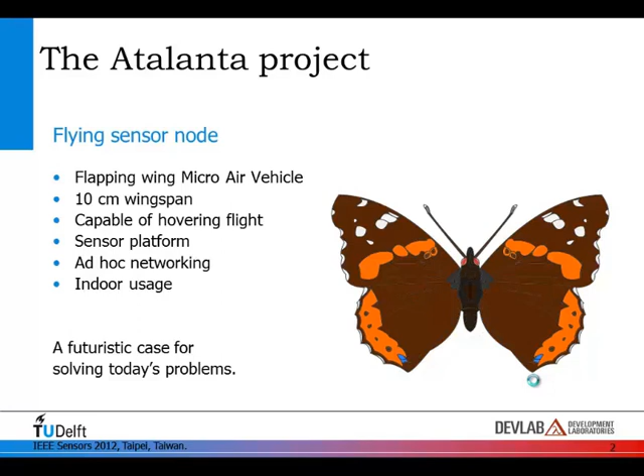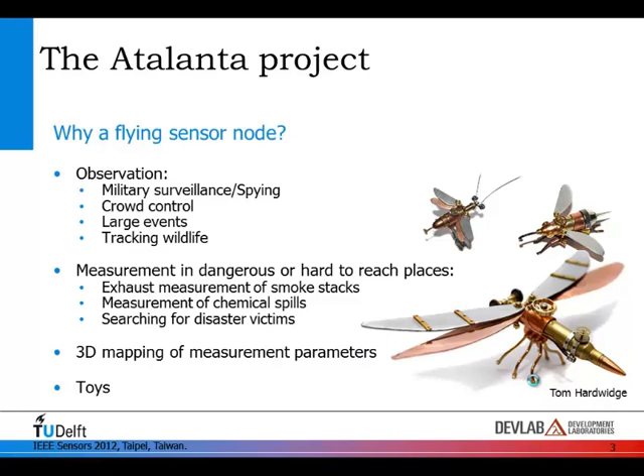I wanted to show you some of the problems and inspirations we found. There's a lot of applications for it. You could do 3D measurements, but of course everybody immediately thinks about military surveillance. But there are many other options, like measurement in dangerous or hard to reach places, or 3D mapping of spaces.

Animals have been flying for a long time, so how have they been doing it? Both insects and birds are at that size, about 10 centimeters. So what are they doing?

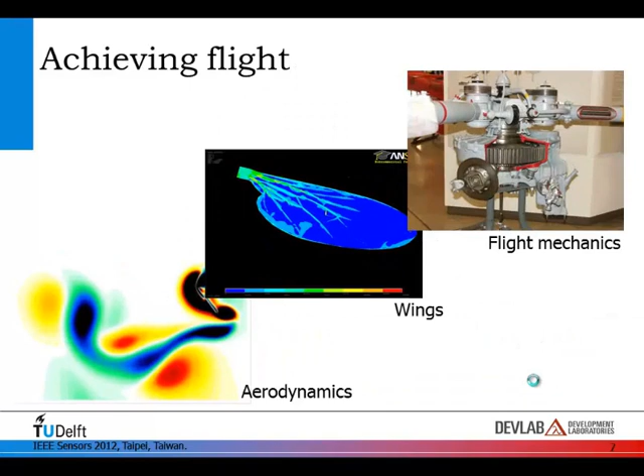This whole project, if you want to achieve it, you have to cover a lot of different aspects, anything from the aerodynamics, wings, etc., power, to sensors and control, navigation, and finally payload. Now I'm not going to talk about everything. We are looking at most of this first part, and I'm going to start with the flying bit, seeing if we can get this platform off the ground.

These aerodynamics are dictated by the wing kinematics, how do the wings move? But reversed, it's also that the kinematics of the wing is caused by the pressure of the air, so there's an interaction there. It is so complicated that at the moment it's not possible to do optimization for the full 3D flapping wing simulation with solid fluid interaction. One flap 3D takes about 2.5 to 3 weeks to calculate at the moment, so no optimization there.

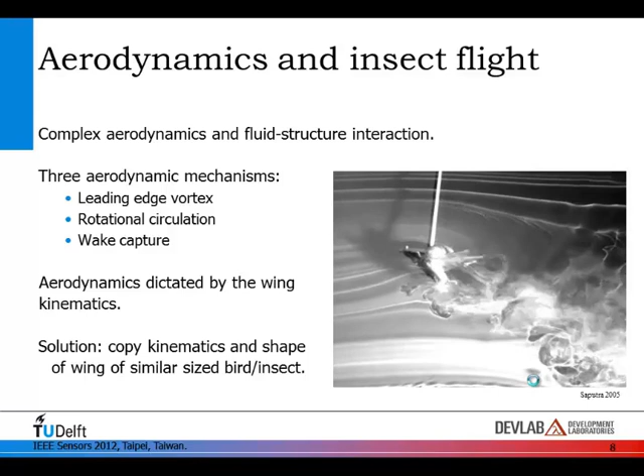So we just want to copy the kinematics of insects and birds of this size, as we think they probably know what they're doing. So how do insects fly? We're mostly looking at insects. Birds are a bit different, of course.

Insects actually fly using their thorax, the middle part of the insect. There's a head, and of course an abdomen afterwards, but there's a thorax in the middle, and it consists of many different structures. In cross-section it looks a bit like this: it's a box, a stiff box.

There's muscles attached to it, and it is brought into resonance, a mechanical resonance. The wings are not directly attached, at least not in most species, to the wing, but through a couple of joints connected to the resonating box to create a rotational motion and a large amplitude. The advantage of this is that you get an indirect wing drive, and you have resonant properties, which has advantages because you do not have any inertial losses when you're driving, accelerating and slowing down the wing.

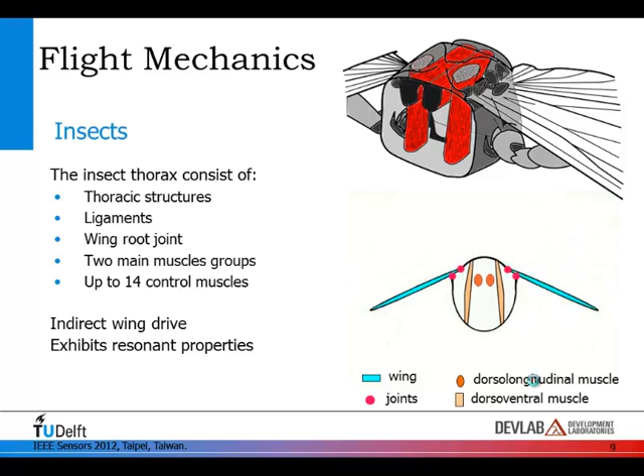So this is actually a pretty good idea. It does mean that your wing flapping frequency is set, determined by the mechanics of the body.

What we can build on this, the basic mechanics, is a sort of a spring with a wing on it, and that is very efficient. We have some amplitude amplification, we can have Q factors. In simple subfabrication you get Q factors in the order of 20 in vacuum, and in air it's 2 to 3 because the lift we're producing is causing a lot of drag and damping to the system.

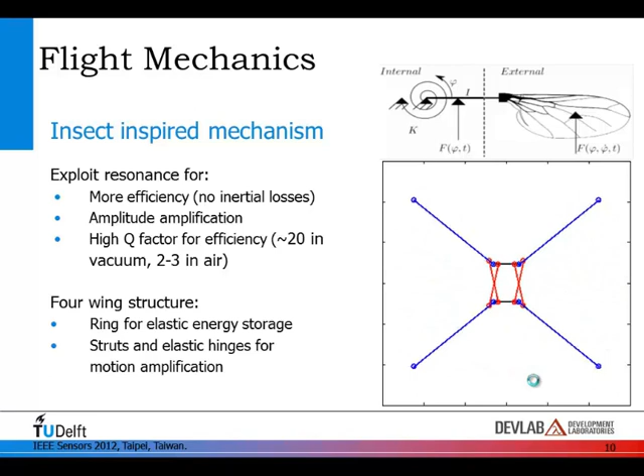So we're using a sort of a ring structure. We see a cross section here with a couple of struts, and if you bring that ring into resonance, it starts flapping its wings. That's the idea, and the whole thing is compliant, so it's a structure without separate hinges.

Now this is creating the flapping motion, but flapping motion is not enough. We also want the wing shape as it is flapping. This is a hawk moth, about 10 centimeters in wingspan, and as you can see the leading edge is rather stiff, but the rest of it is folding back and forth in a certain way, with lift production in the direction of the arrow.

So we want that sort of motion, if possible, in a passive way. An insect does not actively rotate its wings normally. It does do some things for maneuvering, but not for normal flight.

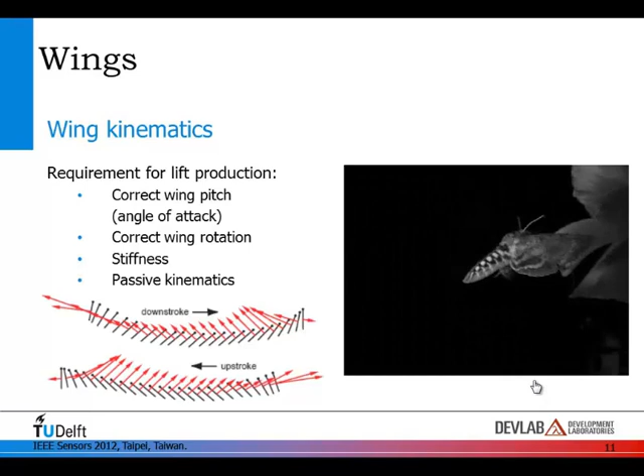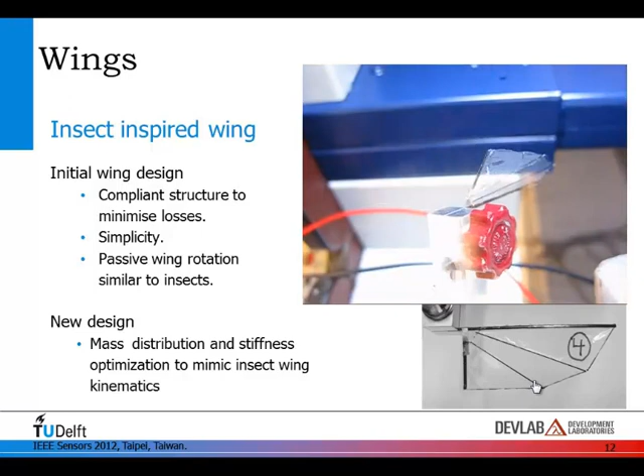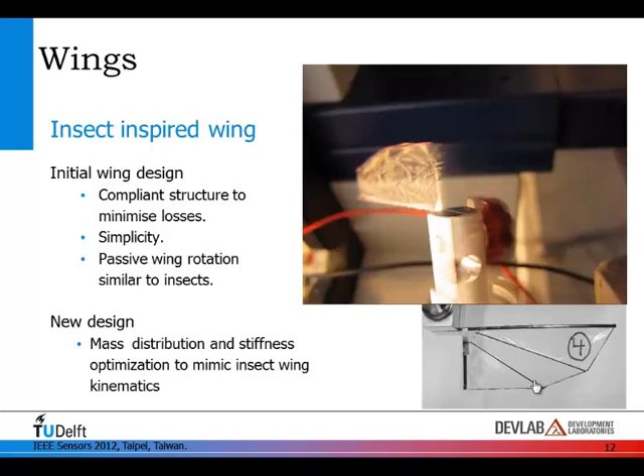And if you can do it passively, it doesn't add any weight. We don't need actuators for this, so we'd like to do that passively as well, which we can do. By doing separate design of the stiffnesses of a flexible hinge, the weight distribution and stiffening of a membrane, we can mimic the deformation, the kinematics of that wing. I'm sorry about the flickering, it was recorded using a strobe light, so it's a bit out of phase here and there.

Okay, so what do we get? This is the overall flapping device. It's flapping at 30 Hertz, which is optimal for that length of wing. That is determined by the size of the device.

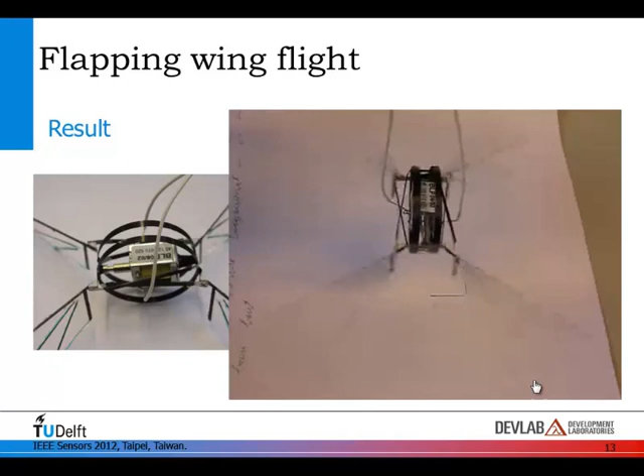We see the ring, we see an actuator. This is just a large solenoid to drive the testing. And we see the wing. Well, it's going too fast to see, so if you slow it down, you can see that this motion is created if you just bring the ring into resonance. And it starts flapping its wings and produces lift. You can also see that this wing, for example, was a sort of a Monday morning product, and it's not quite doing the same thing. So it's very critical in the mechanical design of this device.

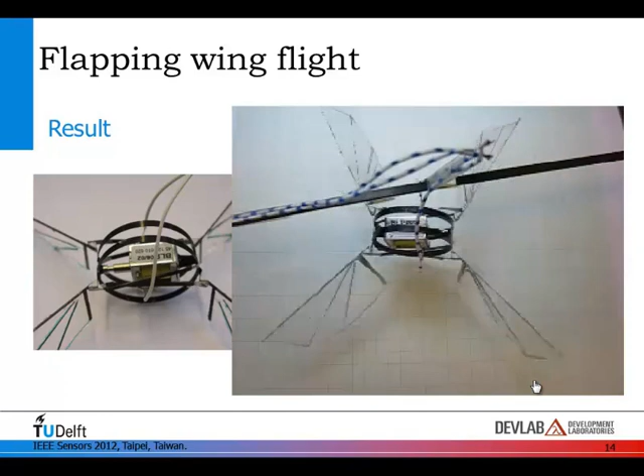Now, that was the mechanics. We're here at the sensors. So we're also interested, of course, in the sensors, but also the steering and the control.

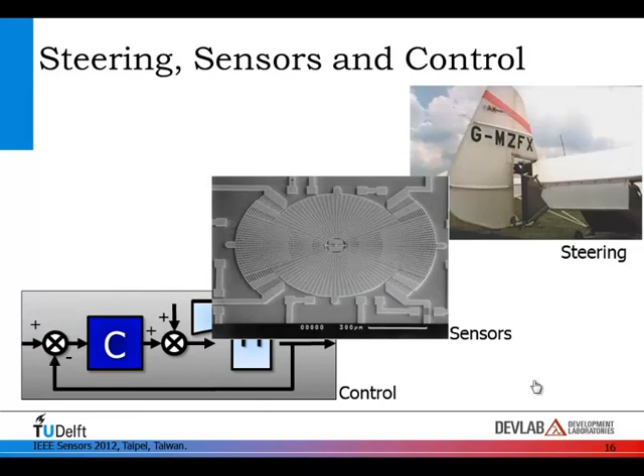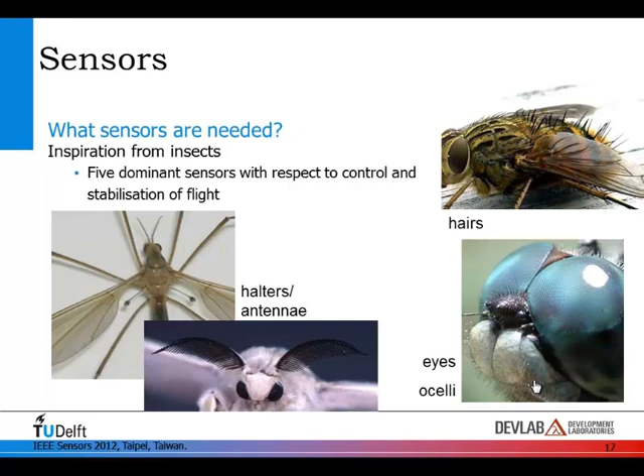Insects, how are they doing it? Well, they use about 5 sensors for flight control, at least these are the main ones: the halters, hairs, eyes, and ocelli. I'm going through these. Most of these are gyroscope-type sensors, and the hair sensors I'm showing later. These have all been introduced this morning also by the plenary session from Khalil Najafi.

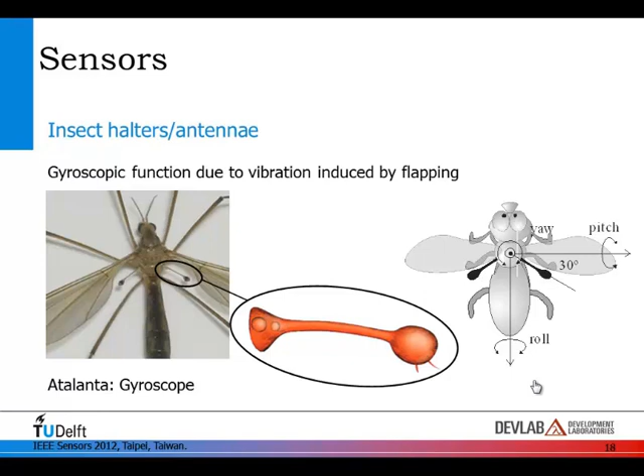So I won't go into it too much, but they have this sort of halter, this stick that is flapping with the wings, and as it is at an angle, they can use it to detect rotation of the body as a vibrational gyroscope. And of course we can introduce gyroscopes as well.

Simple hairs are also used, especially for correction in gusty environments, so if there's wind gusts. So if you have a fly zooming around and there's wind, it will automatically turn into it. There's no brain action involved, it does this automatically. And if you shave a fly, and they've done this, they have a lot more trouble to stay stable in turbulent areas.

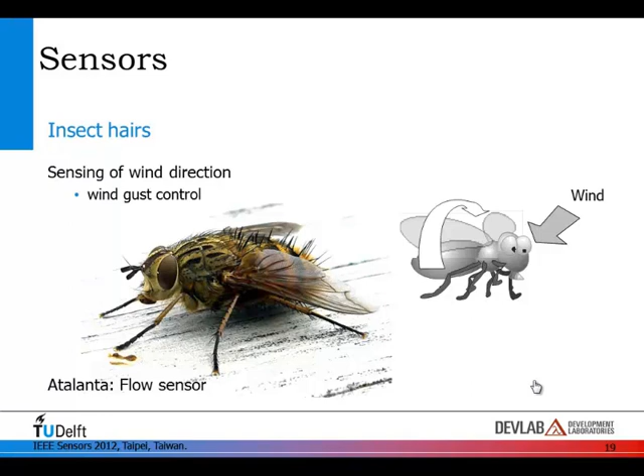Then there are the ocelli, which are a sort of 3 sensitive cells, light sensitive cells at the top of the head. They are very primitive eyes. They don't have an image, but they do look at a light distribution, and they basically say, okay, that's the lightest part, that must be up. So if you have 3 looking sideways, if this one goes up and it sees more sky, that must be lighter. So if they have the same illumination, then it is level. It's a very primitive system, but it's very fast and it works at very low light levels. So that way an insect knows which way is up.

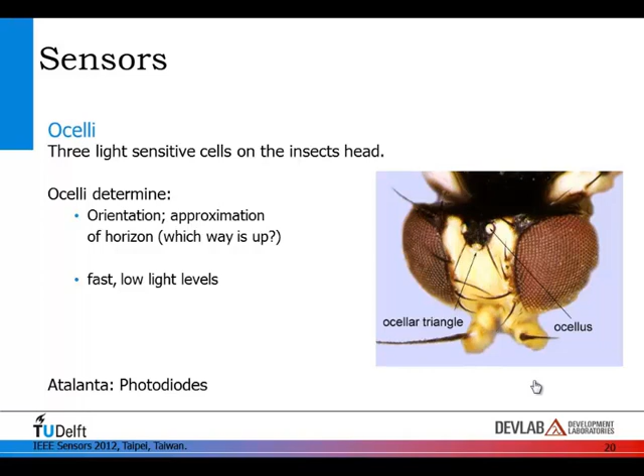And it's very simple, but it's also simple to replicate. Now the eyes, the compound eyes of an insect, are also very interesting. They are for building up an image, so they are looking for things like this. They see flowers and mates and food, but they also use it for motion information. The problem with these is that they are not quite as quick as the ocelli, and they need a lot more light. But we have similar things which we can use, like cameras.

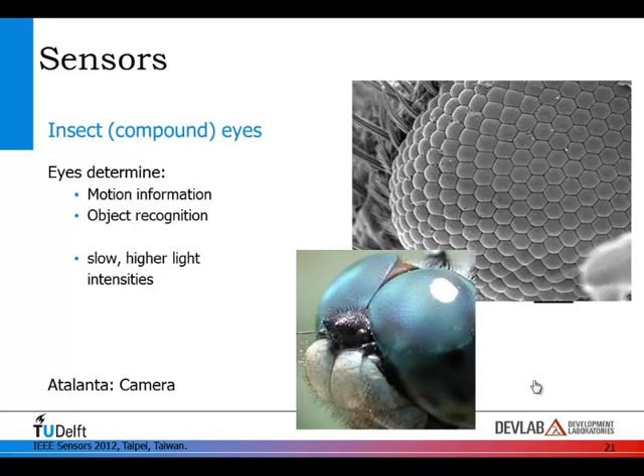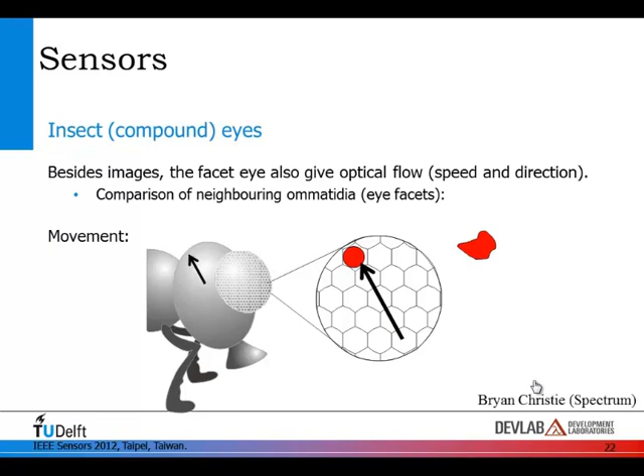I want to show you one idea we have on how to use this concept. Because if an insect looks at something, there is an image of that in, say, one of the compound parts of that eye, the facets. And if this moves, it has this image going through its eye, and that information is captured. So they do a sort of mapping between these things, and they have a direction and speed information without looking at the object.

Now we can do this. They can use this for seeing that they're flying forward, they see motion to the side, they see going up and down, and they can see if they are rotating just by the image information. And of course they can also see if they're closer to the ground, then that seems to be moving faster than things far away in the sky, or if something is moving closer.

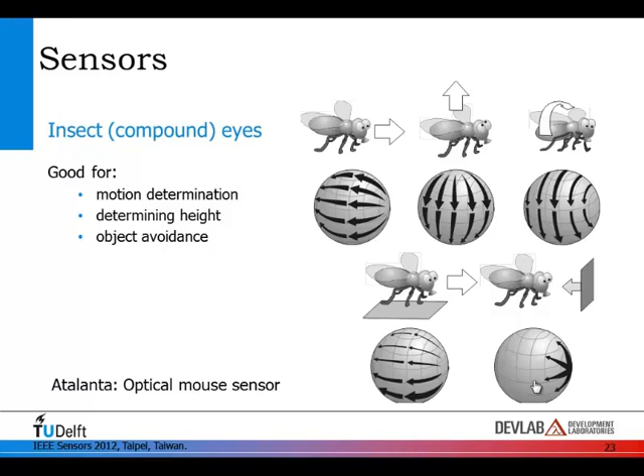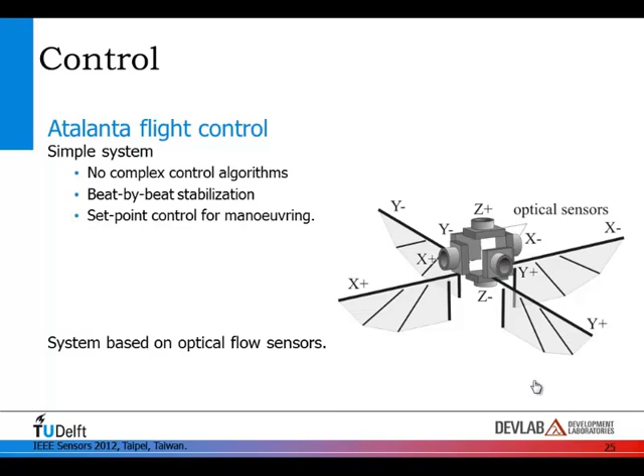So this gives us the option of doing the same thing with a sort of mouse camera. Mouse cameras give you a voltage proportional to a movement vector in an XY direction. So by placing a couple of cameras surrounding this to get some images in all directions, you can actually do lots of analysis. I have to close up here, but we have cameras in certain directions.

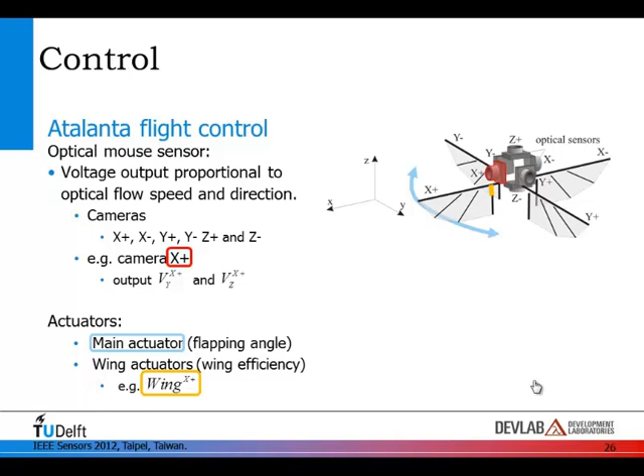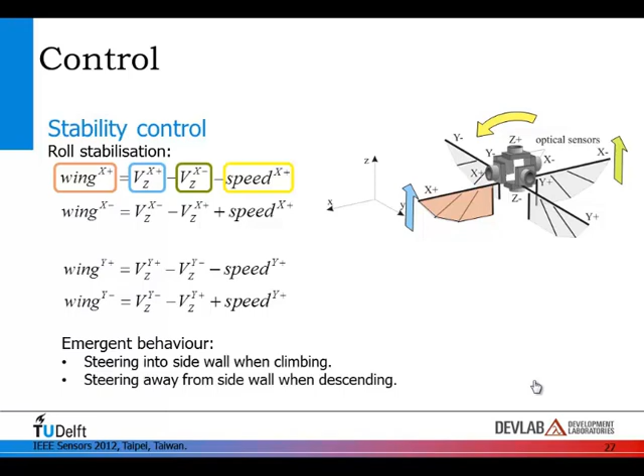We can tune the flapping angle to produce more or less lift, and we can change something in the wings to reduce it. And then if we start doing some math by combining different signals out of these cameras, we can directly drive these actuators. And it also has emergent behavior.

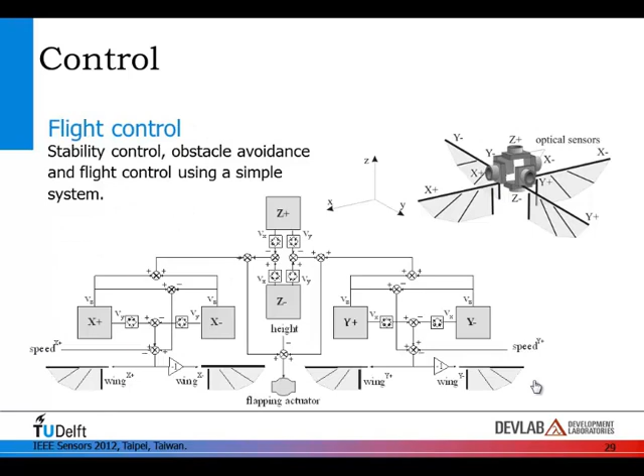Now if we can do this, we can do roll stabilization, we can do height stabilization, and we automatically get object avoidance. It's a fairly simple analog control system inspired by an insect, and with that I want to close off. There's a lot of things we can be inspired by, not just structures or sensors, but also things like control and the physics behind it.